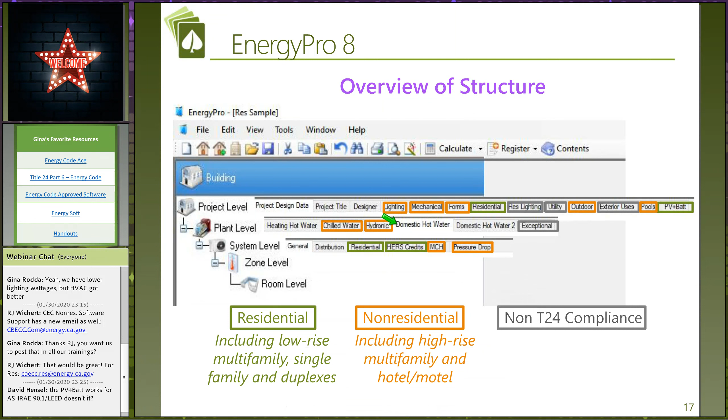The next level of the building tree is where you can go crazy putting in your systems. I want to point out that at the system level, we offer a multiplier. So for that person putting in every single high-rise residential apartment with 300 systems and 300 zones, enjoy your 5-hour runtime.

My approach, we use the system multiplier there, and we trim that down as much as possible, and we get our runtimes down into the 10 or 20-minute range. Same goes for zones - you don't want to go crazy on the zones, otherwise you're going to end up with a crazy, complicated model that takes forever to run. So keep it reasonable, and you should be able to get reasonable runtimes.

The room - now, when we get to the room, you're going to tell me some important stuff here. In particular, things like what do we have as far as occupant ventilation requirements, what do we have as far as receptacle and process loads, etc.

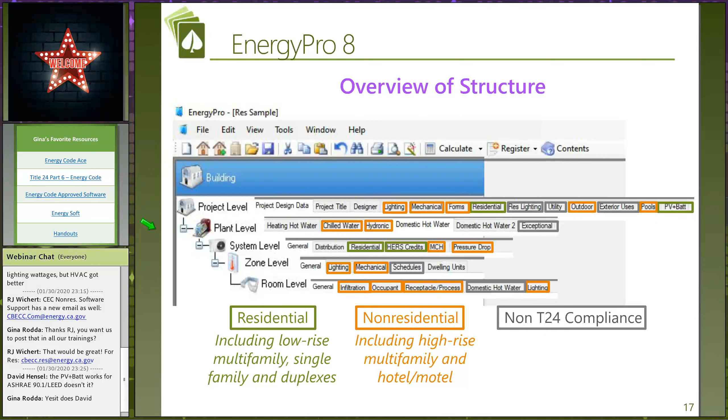While you can go in and do room-by-room inputs, I try to discourage that because that, once again, does load up the run times. I tend to use a one-room, one-zone approach, one room per zone. But that's entirely up to you - I'm not going to tell you how to put your building models together. I just find that the really super complex models take a lot more time to diagnose when you have problems.

We're finding these days, Martyn, using our ventilation system as the primary way to organize our building tree is not a bad idea. Most valuable, yeah, that's actually good advice.

Let's talk about your building scope. We're up at the top level of the building tree here, and you can see there's various inputs. The first one I want to talk about is the building status. Let's just say, so everybody understands, your building is never existing. If your building's existing, then you're not in EnergyPro, you're not doing Title 24 calculations. Existing buildings are not required to comply with Title 24.

Your building is either new, your building has an addition to it, or your building is being modeled with the existing part of the building plus possibly an addition plus possibly alterations. Those would be the three choices you would use there. So existing is not something you would use - you probably ask me what is existing for. Remember, we do other things besides Title 24 calculations here with EnergyPro.

Okay, how about the fuel available at site? Let's read that term again - fuel available at site. Gina, does that say what type of fuel am I using in my building?

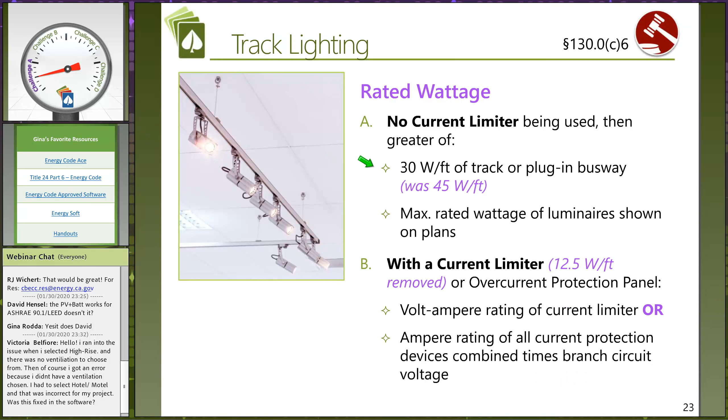Now that we did an overview, let's dive in and really talk about lighting. We're briefly going to go over some of the code changes affecting your modeling regimes. When it comes to track lighting and/or modular lighting systems, we have a change in the watts per linear foot for track — they went down. Usually things don't get less stringent, but this is a case where it did, because most everyone is using LED lights on their tracks. So 45 watts per linear foot of track was grossly outrageous compared to what was really being used, and it's been reduced to 30 watts per linear foot of track.

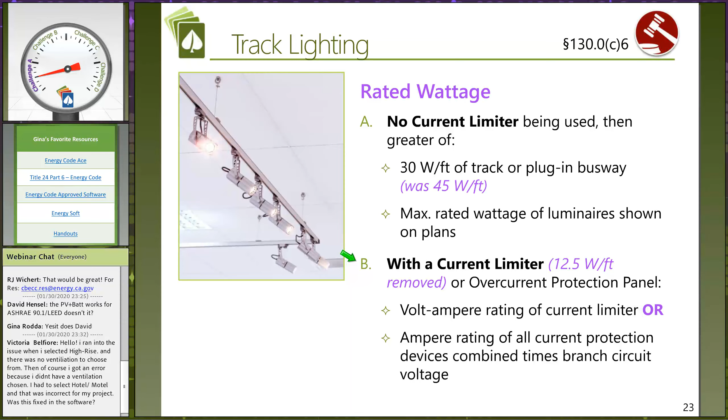There are different ways of showing compliance for tracks, such as current limiters, and they got rid of the 12.5 watt per linear foot of track with a current limiter, and really just said what we want to talk about is what's limiting the current and what that's going to be. So we have slightly different things we need to input to get these to show correctly.

And we have these new power adjustment factors — I like to call these control credits. This is the very first time we're seeing the envelope give us the ability to take advantage of a lighting adjustment that gives me some flexibility.

As we're moving forward in our code development and looking at our buildings as a whole environment, compartmentalizing our buildings and saying I'm doing lighting only, I am not touching envelope, and I am not touching mechanical—well, mechanical goes, I'm only going to do mechanical and I'm not even going to look at your lighting. There's things being left on the table, especially as we're seeing a cross function happening between envelope design and lighting design.

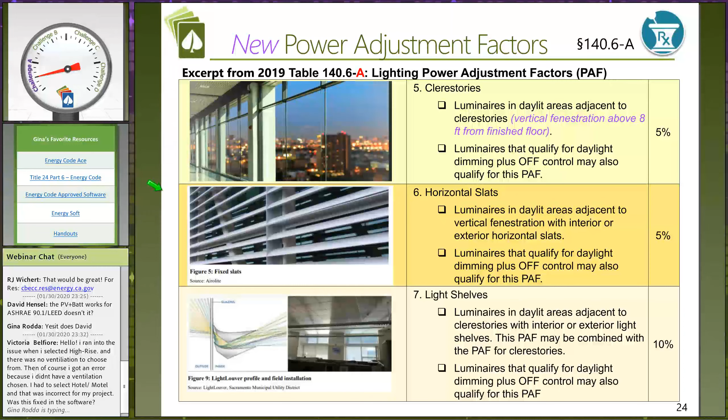And we're probably going to see more of this, aren't we, Martyn? This is an interesting section, because section 140.3 dictates the architectural element, but the credit itself is achieved in section 140.6 under the lighting section.

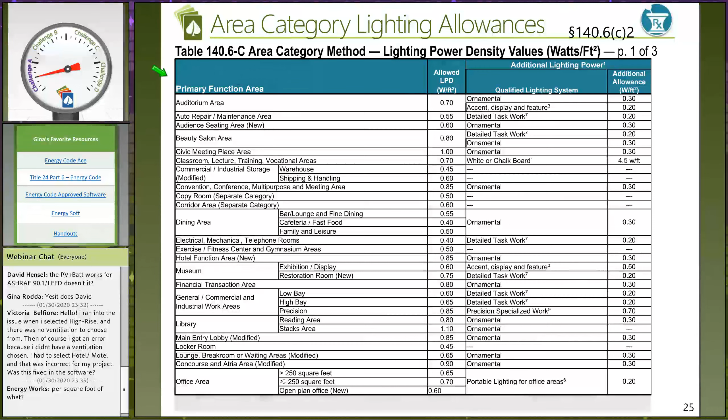Additional lighting power allowances are use it or lose it. You don't get to trade it back towards your general lighting, but it definitely is going to give you that flexibility in establishing what your lighting wattages should be. And it's per square foot of the conditioned floor area of the space—that's what we mean when we talk about square footage, it's of the space that we're modeling. So it's that auditorium area square footage that I'm looking for.

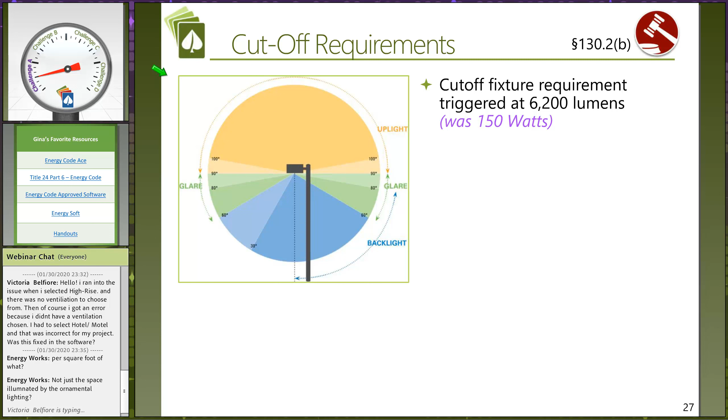When we talk about outdoor lighting, this isn't something we're used to thinking about in terms of performance software, because it's not part of your performance software. It's if you are deciding to use EnergyPro to also show compliance to your prescriptive requirements in code.

Martyn, catch them up to speed on some of these changes that are really going to change their modeling for outdoor lighting. One thing you're going to have to understand is this concept of BUG—backlight, uplight, and glare. They're basically triggering this now down at 6,200 lumens, which back in the day was a lot of wattage on the fixture. But these days, with LED outdoor lights running 150 to 180 lumens per watt, that's not that many watts—you can probably trigger it at 40 watts.

So they're ratcheting it down to much lower wattage fixtures on this requirement, and they're requiring that you take a look at CALGreen Part 11, Title 24 Part 11, and look at the backlight, uplight, glare requirements, getting that rating from the manufacturer of the fixture, and determining that you are meeting that as a mandatory measure.

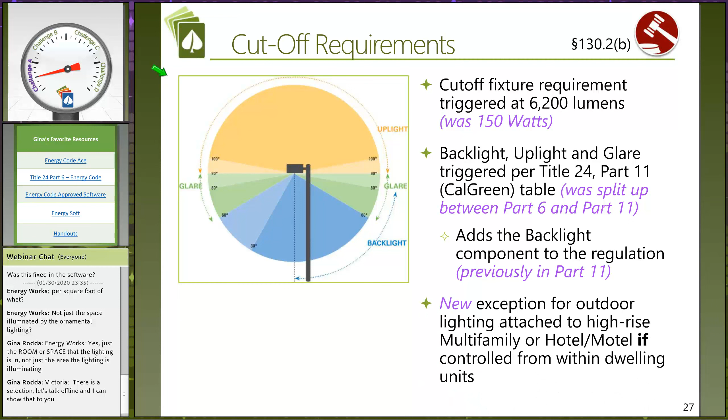So we're seeing a real connection between Part 6, the Energy Code, and Part 11, CALGreen, in which requirements for both of those building code sections are going to be integrated into the forms and into EnergyPro compliance software to be able to utilize the prescriptive form options.

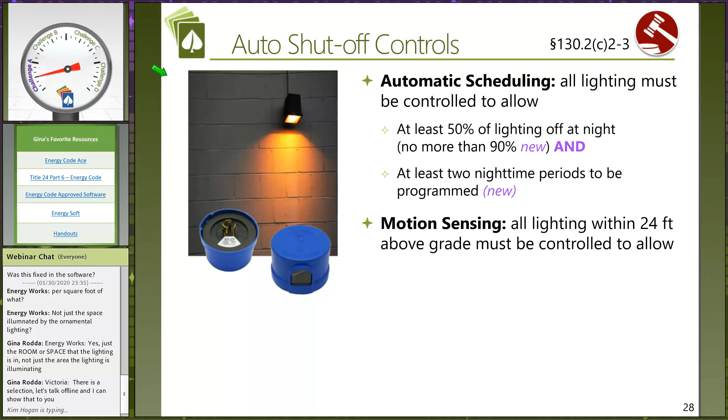There's also control requirements, not just for indoor lighting, but for outdoor lighting. This automatic scheduling control requirement is catching a lot of people by surprise. If you are going to be that energy consultant or person documenting the outdoor lighting controls, everyone has to be on the same page of how they're going to go about satisfying not only the automatic scheduling requirements, but the motion sensing requirements that may be associated with a lot of the light fixtures that are within 24 feet of the ground out there in that outdoor environment.

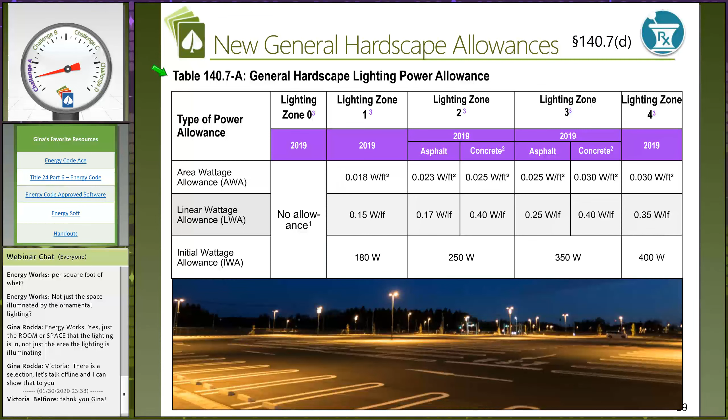Just like for indoor lighting, we see that the wattage allowances for outdoor lighting got reduced quite a bit in this 2019 code cycle. Martyn, talk to them about this asphalt versus concrete lighting issue. Take zone 3 as an example, that would be an urban area. So I'm going to guess everybody here is probably urban. You'll see there that they are giving different allowances depending upon whether that hardscape surface is asphalt or concrete, and concrete in fact gets a higher allowance. So most of our parking lots are going to be asphalt, and probably most of our sidewalks and pedestrian areas are going to be concrete. But that's one of these things you're going to have to make a determination, talk to the design team and say, hey, I see some drawing here of this little plaza area, what's that going to be? And that'll determine what you get for an allowance.

I have come across a couple of projects where they do install the overcurrent panels. The industry has had those out for quite a few years actually. There's one product out there, not that I'm supposed to name products, but it's the only one I know of. It's called the Silver Bullet.

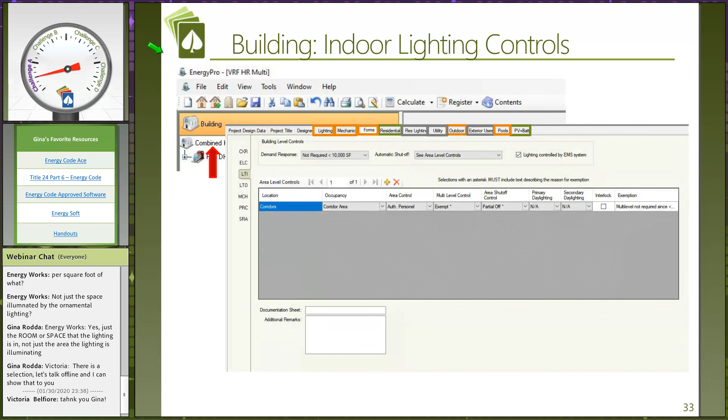We have found sometimes we have to have people change their light choice just because we cannot find the cutoff ratings to be able to document that they're meeting these Cal Green requirements. So there's definitely going to potentially be some more work regarding our outdoor light fixtures that are over 6,200 lumens.

Now we're going to spend a little bit of time on the Forms tab. Martyn, walk us through this Forms tab. We actually have the majority, well, all 10 of the compliance forms that are required for Prescriptive captured in the software. You'll find this tab here is used for documenting the NRCC CXR commissioning review form, a mandatory requirement. There's another mandatory form you need to document, the electrical distribution system.

I've got indicated here, or you do, the LTI tab. This is where I input information on the controls associated with indoor lighting. This tab serves two purposes. Number one, it documents on the prescriptive compliance form the various types of controls you're installing. Number two, it is set up to pass the same information over and document it on the NRCC PRF01.

Now, it turns out right now that PRF01 is not actually spitting the information out. It's being handed the information, but it's not yet configured to document the controls. We are going to be getting an update from the Commission, and that update will eventually document on the PRF01 the control entries you put in here. So just for the record, anything you see here is not currently activated on the PRF01. Once it is, you'll start to see it populated there.

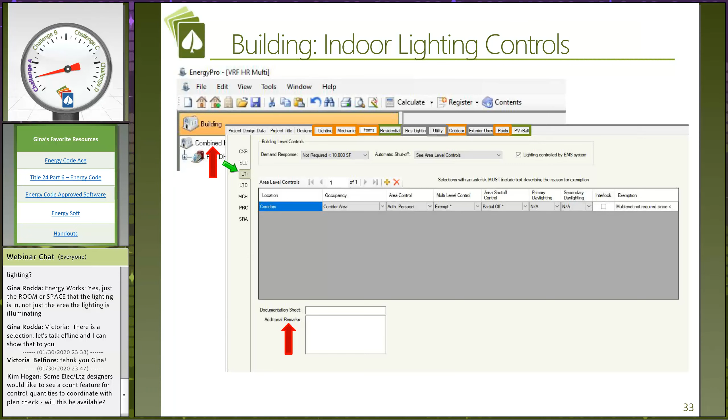Is that correct at the project level? There's no field currently for the exemption you just pointed out on the far right of the first form. That's a prescriptive form thing only, but it will make the difference between it showing compliance or not.

Here's my outdoor lighting tab. Nothing is new here. You do need to make sure you have your appropriate outdoor lighting zone and that you've engaged it, doing proposed outdoor lighting as installed versus use override.

Martyn, when would I ever use override? It would be useful if you were doing a calculation like ASHRAE 90.1, because ASHRAE 90.1 includes that energy component in the calculation, but the Title 24 calculation does not include any outdoor lighting. It's not on the documentation, it's not in any of the calculations. So the only purpose of putting outdoor lighting in is either for other codes like ASHRAE 90.1, or if you need to do the prescriptive form.

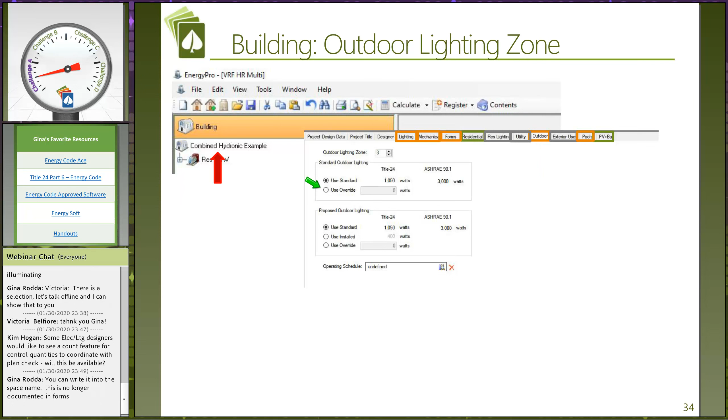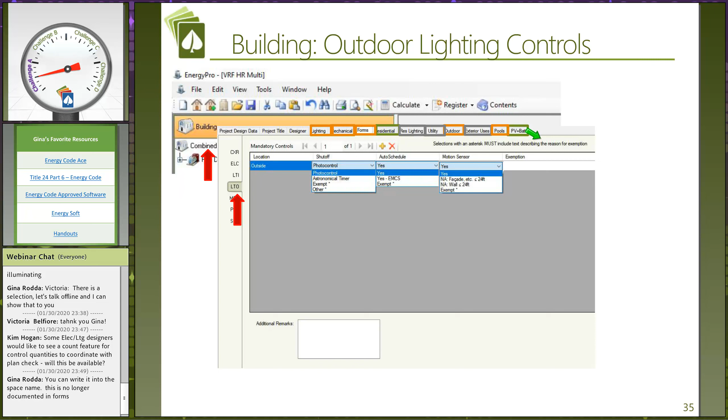Let's take a look at the controls for outdoor lighting. It should look awfully familiar - very similar to what we see for indoor lighting. Here are your different choices, remembering that if you choose anything with an asterisk for the prescriptive, since this is only prescriptive now and never shows up in your performance calc, it must be included. Martyn even notes that selections with an asterisk must include text describing the reason for exemption. Otherwise, the form won't show compliance to your prescriptive calculation.

Martyn, talk to them about these power adjustment factors. Got it - there's an allowance table in section 140.6, I think it's 140.6A, and that's the power adjustment factors table. We gave you an excerpt of part of that a little bit back there. There's all sorts of lighting controls you can take credits for.

However, if you try to take credit for a lighting control that is listed in the table as not valid, the software is going to flag that as an error. Let me give an example: say you're doing a new classroom and you install occupancy sensors. EnergyPro is going to flag that as an error, say no can do. Why? If you look in the standards, occupancy sensors are mandatory in classrooms, so we're not going to give you credit for a mandatory control - only ones that are allowed in table 140.6A. You can see those ones Gina talked about at the bottom there - the clerestories, the slats, the light shelves, etc.

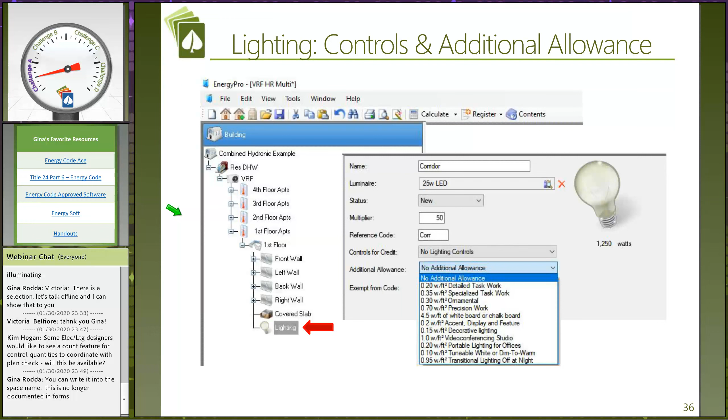I also want to tell people to think about this when doing your performance models, for indoor lighting in conditioned spaces, because the more you put into what you're allowed to do in your baseline building, the better your compliance margins will be. So don't leave these off the table, especially if you're not complying by 0.02 and could have used additional lighting power adjustments. That's just leaving energy on the table, and we shouldn't be redesigning buildings just because we're not modeling it thoroughly.

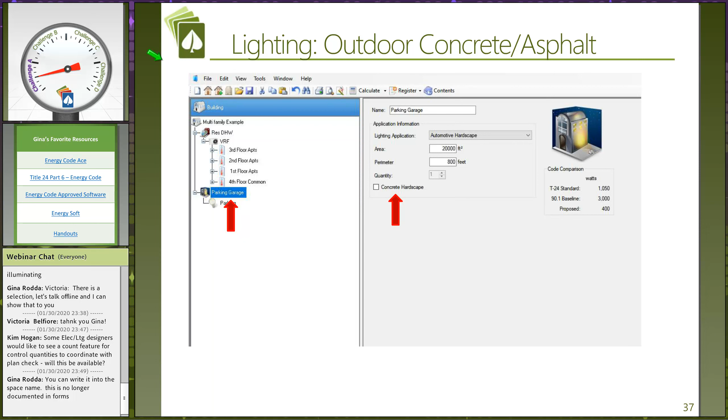Here we have our outdoor lighting. We have different choices now for automotive hardscape versus pedestrian hardscape - nothing new there. What is new is this concrete button. If you don't click it, it assumes asphalt; if you do click it, it assumes concrete. So you might have to break out your sidewalks separate from your parking lots, like Martyn was saying, to properly account for your allowances of concrete versus asphalt. You might have to break things down a bit more. Let's see what that looks like on the forms.

We're always going to have a compliance software version - it's really important we're keeping up on using the latest and greatest certified software for our permitted projects. Scope of work - make sure that's linking up to what you think it is, because it could really be changing your compliance margin if you accidentally modeled something as an addition versus new construction or an alteration.

Absolutely. So in EnergyPro, you can specify what your scope is going to be. We've got a bunch of check boxes there - you can say yes, I want to do envelope, yes mechanical, yes domestic hot water, yes indoor lighting. Those will get checked off according to what you select for scope.

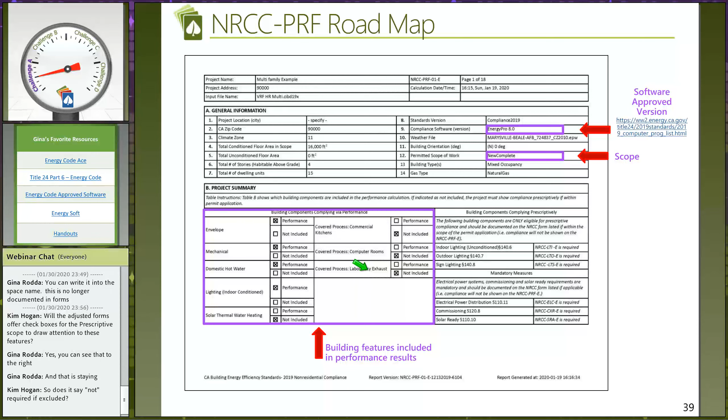I'm with Martyn. The process forms have a lot more support to the control requirements and other things above and beyond just the fan energy. And I have a tendency to use the prescriptive or mandatory process forms instead.

Martyn, what would I use C2 for? What is this above code qualification thing all about? Well, as you're aware, there are a number of jurisdictions in the state that have said the state energy code, what Sacramento is putting out, is not good enough for us. We want better buildings in our jurisdiction. So they've got above code ordinances that say you've got to do better than Title 24. It depends on the particular ordinance as to what they've got. And I'll promise you guys there's more ordinances coming out this year. So we're expecting a lot more ordinances from these jurisdictions.

So what you're seeing down here are all the other energy use components being reported. What's missing from this table, which is kind of interesting, is that this table below will include, when you specify it, PV plus batteries. So if you decide to put that into your calculation, you will get that show up in the bottom table.

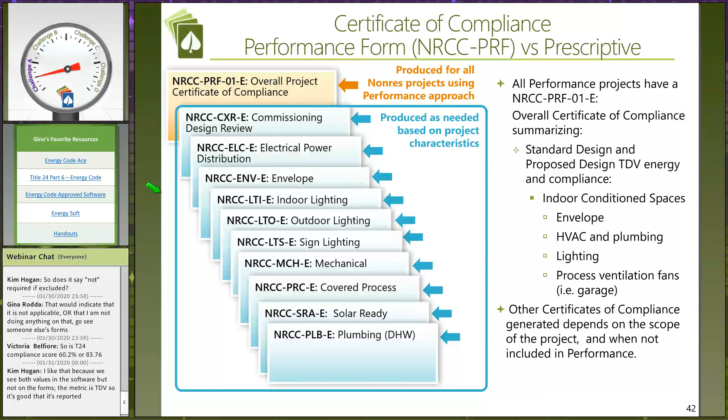Building departments are still getting up to speed on this too, so do expect to get a few plan check comments in which you're going to have to bring them into the fold of these new prescriptive forms.

Here's an example of the outdoor form for this particular project. As you see here, it's the NRCC LTO-E form. And project table B, pretty across the board whether it's performance or prescriptive, is going to be talking about what's the scope of the project, what's included.

And this is brand new, table C. Martyn, talk about how table C is important to these prescriptive forms. Every single prescriptive form is going to have a table C, all 10 of those that I just showed you. And on each one, it's going to show the compliance results.

So there's a couple of things going on here. We comply with the allowed wattages, in this case the allowed hardscape, general hardscape wattage. We comply with the cutoff requirements. We comply with the requirements for lighting controls. If any of those states we don't comply, then you need to go to that particular section, and it specifically tells you, see table G, see table H, etc. The general lighting is over on table I. It's telling you where to find all this information to find out why you do or do not comply.

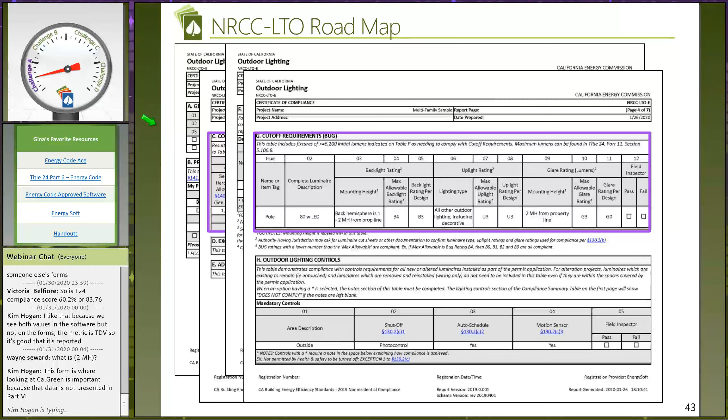Kim is saying this form is where looking at CALGreen is important because that data is not in Part 6. You're 100% correct, Kim. Energy Code Ace has a fact sheet called Mandatory Lighting Controls that has all of those tables from Part 11 integrated into it, so you can see Part 6 and Part 11 side by side and really send that to your clients so they understand what light specifications they need to provide. We see our outdoor lighting controls look very similar to what we've been seeing for indoor lighting.

Now that we've gone through lighting together, let's ask you a couple questions to make sure we're on the same page. My first question: which of the following lighting locations are going to be included, if you so desire, in your performance calculation? And alternatively, which of the following lighting locations will require you to use the prescriptive method? I don't care what you did in the performance method. And at the project level, which tab are you going to use to support the prescriptive forms?

Okay, this is how we can tell how many of you are multitasking. A lot of you are multitasking. Okay, I have at least half of you now answering my question.

Okay, for this first one, Martyn, which lighting location can be included in the performance results if they so desire? So the only one that is factored into the calculations would be lighting fixtures that are in conditioned spaces. So for those of you who picked conditioned space, you are spot on. All the other locations are not something that's going to be included in your performance calculation. Yes, you might have modeled it in EnergyPro, but you need to know it's not going to be included in that NRCC perf form.

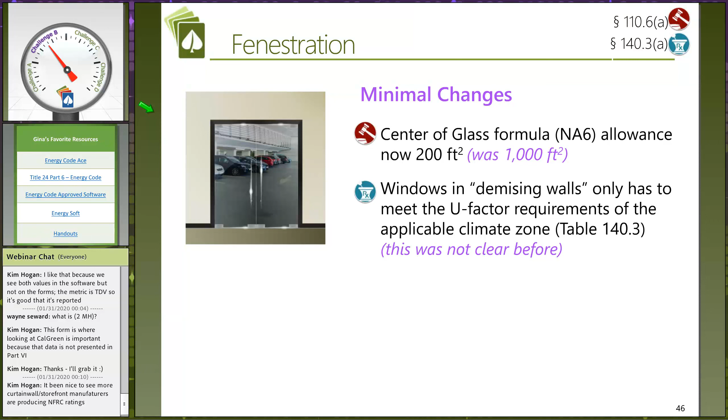Windows in demising walls - those are walls that separate enclosed unconditioned space, such as a parking garage, from enclosed conditioned space, such as, let's say, an office building. This picture here is showing an example of me looking out of my office building into my parking garage. This glass door only has to meet the U-factor requirements of the code and does not have to meet the SHGC or VT requirements.

Tubular skylights - this is them relaxing code to help promote this amazing way of bringing natural light into spaces. Martyn, what's different here? So in the 2016 code, tubular skylights technically fell under the plastic skylight category, but now they're given their own category. And one of the things they don't have to do is comply with the SHGC solar heat gain requirement, and that's primarily because they're plastic dome products.

And so to get a low SHGC and still maintain a really good visible transmittance kind of dictates that you need a low-E coating. But sputter coating a metallic low-E onto a plastic dome does not have a good outcome. So net result, it just doesn't make sense. Well, no, it doesn't - it melts the plastic.

So you get my point - you can't put a low-E coating onto the plastic. So as a result, they say, all right, let's not worry about the SHGC. Let's go after the VT so we can get lots of good natural daylighting in the space.

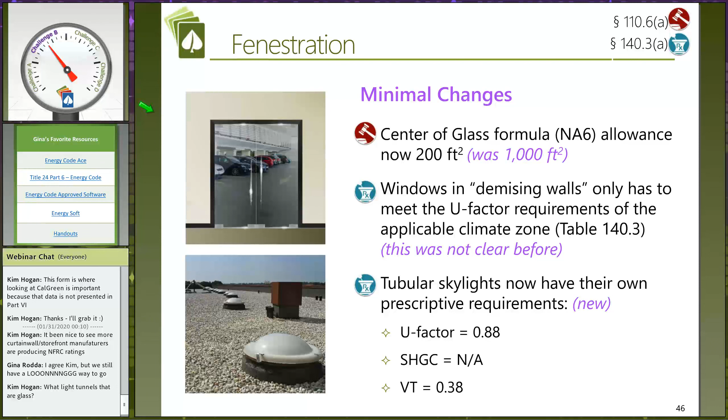And what this means to us is, for those of us who have been using these tubular skylights all along - I know I have - I've been taking a pretty big hit in my performance calculation. Now that's not going to happen as much. Light tunnels that are glass, well, those are considered skylights, Kim, and I don't think I know of any solar tubes or anything like that with glass versus plastic. Do you, Martyn? No, they're all plastic dome. Yeah.

Okay, let's talk about modeling. We're going to start with our assemblies, and we're going to look at fenestration. I'm going to have Martyn walk us through these different aspects of what we're seeing here for fenestration.

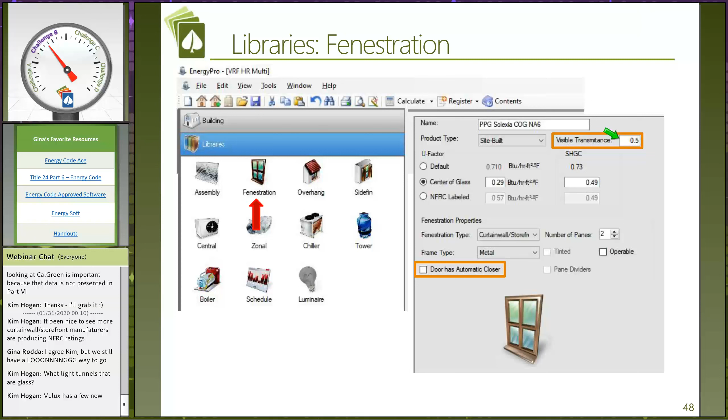What I'm going to use for center of glass, what I'm going to use for default, and what I need to use for NFRC. Default, I highly recommend you reconsider using that in your Title 24 calculations, just for the simple fact that you'll get to the end and find your building doesn't comply. Center of glass, Gina's already talked about the limitation there: 200 square feet, and that's it. You're out of that approach on a site build. So this leads you towards the most likely candidate, which is an NFRC labeled product, National Fenestration Rating Council. Give me the U factor, the solar heat gain coefficient, and don't forget the all-important visible transmittance. That's a very important number to Title 24 compliance. Once you've given me those three numbers, we're kind of good to go.

Talk to me about the fenestration properties. How are those important? If you look in the Title 24 Standards, Section 140.3, the table lists different types and criteria for compliance. There's compliance for something like a fixed window, a different compliance criteria for doors, and another one for curtain wall storefront systems. One is fixed and one is operable as far as the windows go. Those designations dictate what the standard building is using in the energy budget. So what you should be doing is distinguishing in your building between the different fenestration types that we describe. And of course you see the skylights there as well, right? The skylight tables also have distinctions based upon whether it's with a curb, plastic, glass, etc.

How about the door automatic closer and this operable checkbox button over here to the right? Sure, so there's a distinction in that table in 140.3, and the distinction is: is a window operable or is it fixed? That'll tell us which you get compared to in the budget.

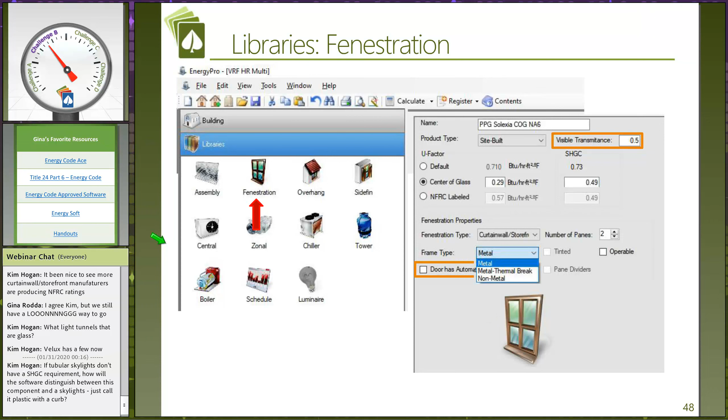The operable checkbox is part of the window door interlock issue also. If you have this checked off, then the compliance software, if it's a non-residential building or a hotel motel building, is going to assume in the baseline building window door interlocks between the HVAC system and/or the controls in the space for that zone. If you don't have window interlocks modeled in your building and your mechanical side, you're going to be taking a penalty for not providing those. In the 2019 code cycle, they removed the requirement for window door interlocks for high-rise multifamily buildings, but they are still in play for non-residential and hotel-motel buildings.

Let's now look at our forms. So here we have our envelope. This is the very first table we see for envelope, and I use this one all the time just to get myself a sense of: have I modeled most of the building? How am I in terms of my fenestration area per orientation? I always take a quick look at these window-to-wall ratios. Whenever I have someone send me a file going, Gina, I'm so out of compliance, what's going on? I always look here because, Martyn, what do we find here that tells us something about their compliance margins?

Title 24 prescriptive requirements will give you an allowance of 40% of the total gross surface area of the walls. It also will allow up to 40% on the west facing. So when you look at the total here, which we see identified as being 19.6%, we can say okay, we're okay as far as Title 24 goes. When we look at the west facing, we say 10%, we can say okay, we're okay. But when those two numbers exceed 40%, either one or both, then that's when you're taking a significant penalty for that envelope design, in that it's got too many windows on it, and you'll need to rethink that if your building is out of compliance.

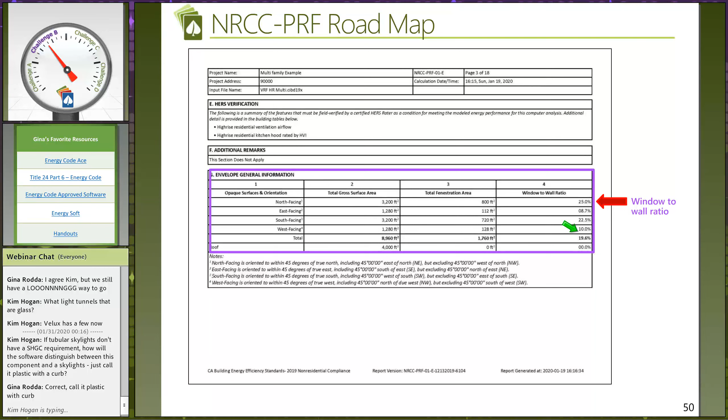So it's a real great way to give you a gut check of what's going on with your envelope.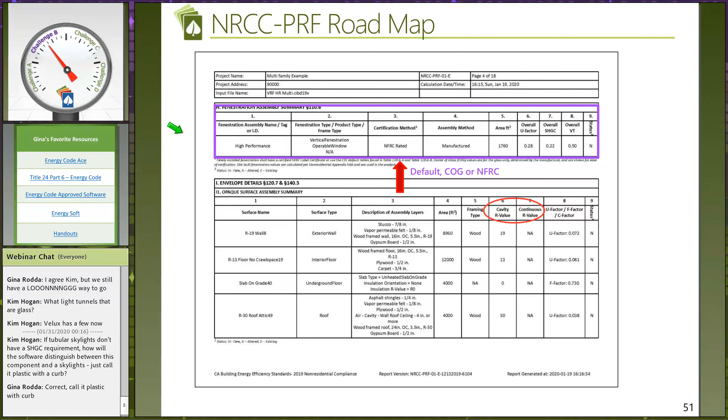It's right there. I wanted to call attention briefly to our performance form, and this is also in our prescriptive forms, that we do break out separately insulation interrupted by framing, which is cavity R value, versus insulation that is not interrupted by framing, which we call continuous R value. One of the exciting things we just saw is the CF1R also now calls out insulation this way, aligning our documentation between our residential buildings and our commercial buildings.

HVAC, what is so exciting about VRF, Martyn? Well, other than the fact that they're asking for higher efficiency models, which shouldn't be an issue, we can now model them in the performance approach. So this is big news. It's been a lot of years coming in terms of allowing the performance tools to model the VRF, but now we can model them.

And I have to admit, I know there was some grumbling from the manufacturers as to the details and whatnot. I have to admit, it's a very satisfactory outcome. The VRFs are looking pretty darn good when it comes to compliance.

And I believe, Gina, you were saying you were doing some buildings where you were hitting 20% better than code, thanks to your VRF system. Well, that was someone who sent me a file going, something's wrong, Gina. Something's wrong, I'm at 20%. How did that happen? I ran the same building in 2016, and I was minus 15%. What's wrong? And I'm like, it's right.

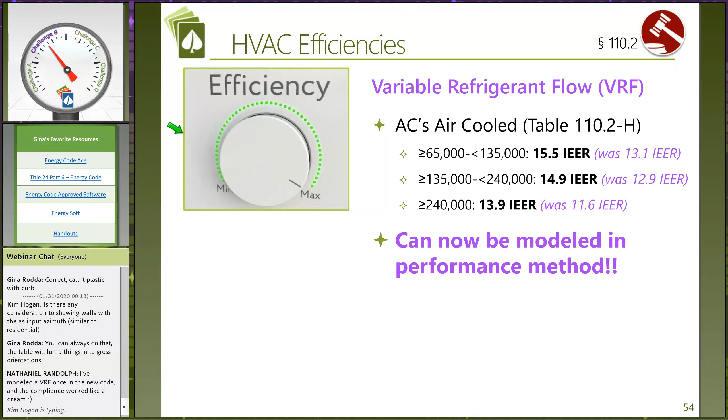That's right. And I was able to verify it. I was able to look at the standard baseline reporting behind what it was being compared to. It was being compared to a package VAV, and the fan numbers for VRF are a lot better. So package VAV, the fan numbers are much higher than VRF, so it's getting really nice credit for that particular design choice. And there's even more fan credits we can see associated with our systems.

We do have MERV 13 filters now for all new systems and all systems that have all new ducting. So that's something to be aware of. But what also we have, which is really allowing our mechanical modeling to really reflect the design, is these fan power adjustments. Martyn, how do I use these?

Well, the fan power adjustments are credits that are specified in section 140.3 of the code. There's a table there. The general idea behind the fan power adjustments is you're designing a system and you get a certain fan power allowance. But because that system has something in there that is going to require additional fan power - let's take an example, it's got a fully ducted return - then they're going to give you additional fan power allowances in the energy budget. It's not going to change the consumption of your building. It is going to change the actual energy budget that you're compared to. And it's definitely something you want to consider.

Also, keep in mind, Gina, you put the MERV 13 filter up here. I want to make it clear to everybody that's a mandatory measure, and you don't put that into the software. It has a MERV 13 filter. That's already built into the fan power allowances. So it's only when you push the MERVs up higher to like MERV 16 that's when they give you additional allowances. Somebody asked me the other day, do I get an additional allowance from MERV 13? It's already built into the numbers. It's already there.

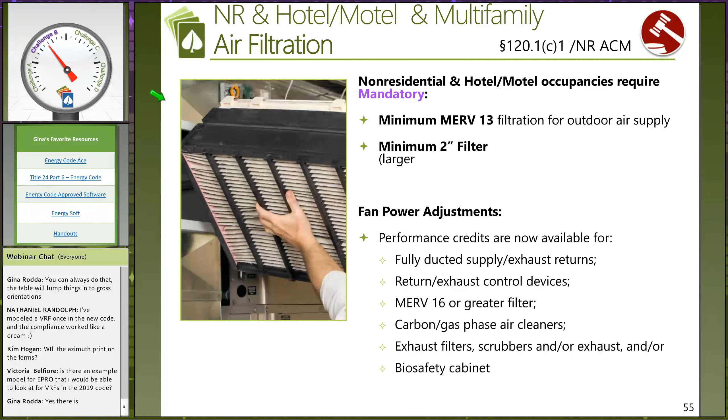What I like about this is it's much cleaner for us to document these adjustments now. Before, it was this weird number, or what is the static pressure, water column, blah blah blah, and you'd have to ask the mechanical engineer, give me a number. Now we have things that can be clearly documented that match up with the design of the building, and to me it still makes more sense. It's easier to do as an energy consultant.

Demand control ventilation, these are CO2 sensors. We are going to be seeing more of them because the requirements for them have been expanded to include any modulating outside air control system and/or any system that has outside air exceeding 3,000 CFM.

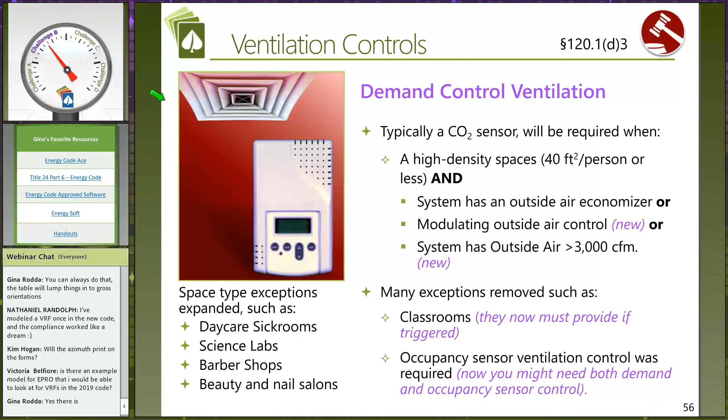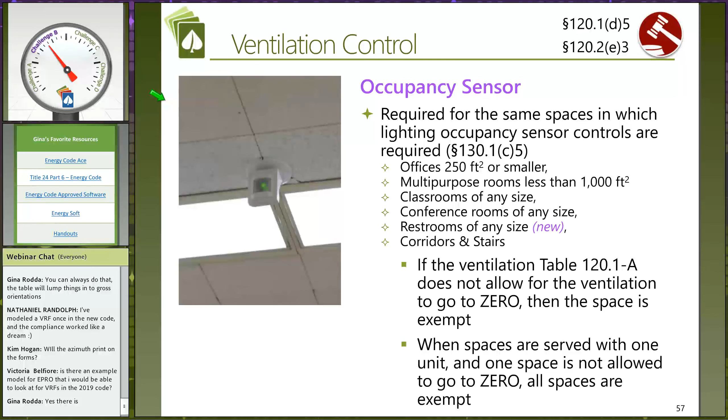These are not new controls. We're just going to see them more often. This is another control that's not new at all: occupancy sensor ventilation control. What is new is the code saying that in these spaces where I have lighting control occupancy sensors, here's the list of it, my ventilation table is allowed to go to 0. That occupancy sensor ventilation control is going to shut down the ventilation when no one is in the space. So this is a pretty new thing.

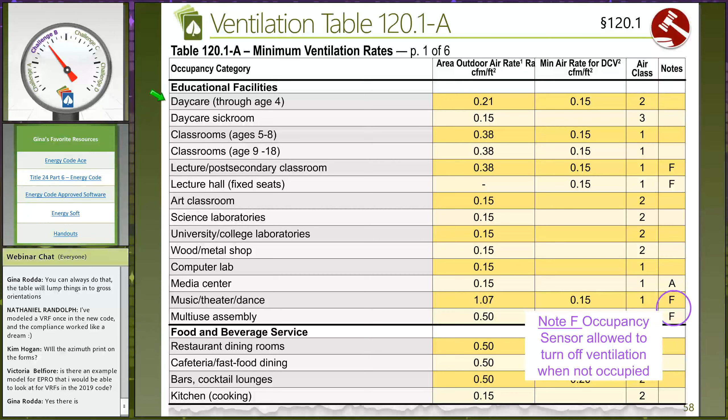Let's take a look at this ventilation table to see how we determine if a space is allowed to go to 0 with this footnote F. There are a lot more occupancy categories now. This matched up exactly with what Martyn showed you guys at the beginning of our webinar about setting up the occupancy for your zone, which also then sets your lighting categories. So there's a lot more going on now for ventilation.

My mechanical engineers out there, I sure hope you're beefing up on these new requirements, especially for ventilation in the energy code, because it's a whole new game.

Martyn, tell them why we think this is one of the most important blueprints people need to have on hand when we consider occupancy sensor ventilation control.

Absolutely. So when the Energy Commission published the code, there's certain language you'll read in section 120.1. If you read it verbatim, it kind of says, look, if you've got any F-based occupancies that also have the lighting occupancy sensor, then you've got to do this. And that leads you to believe that if I've got a single zone system serving all these different spaces, and I have 3 F occupancies and one non-F, then I kind of have to have the sensors in all the different spaces. That's kind of what it leads you to believe.

Well, the clarification here is: if you've got 3 F spaces and then 1 non-F space, in that circumstance you don't need the occupant-based ventilation control, period. You may not get that by reading the actual text of the standards, but you certainly will get that in this clarification. So it's a very important blueprint for those of you doing mechanical design and modeling.

And I like that they just gave a few different scenarios. I really do think they thoroughly answered that question.

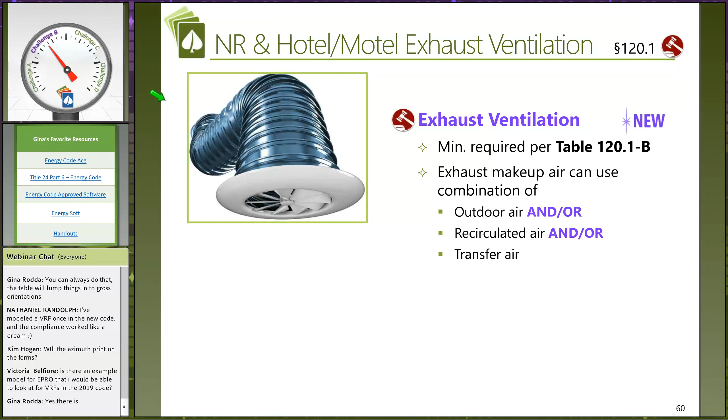Multifamily, this is going to apply for both low-rise and high-rise. This is the first time we're really seeing an alignment of low-rise and high-rise ventilation requirements, not only for the ventilation rates, but the ventilation requirements and other indoor air quality requirements. Martyn, walk us through this.

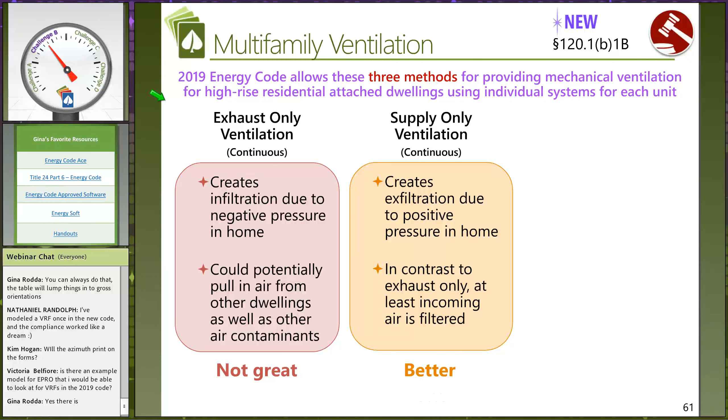Absolutely. So one way to provide ventilation in this situation, and this is probably a fairly common scenario people have been doing over the years, is to simply put in an exhaust fan and pull air from wherever it comes. So yeah, that's not the greatest approach. The second one is a little bit better, and that's to pull air from the outside and supply it into the space. Obviously that requires the MERV 13 filter we talked about, and that does put the unit at positive pressure.

So the third approach is what we call a balanced ventilation system. In the case of the balanced ventilation system, we are at neutral pressurization, and we are providing ventilation into the unit, taking ventilation air back out of the unit, and basically the HERS rater is doing tests on all three of these circumstances I'm describing, which is new, and they will verify if we comply. In the case of the balanced ventilation system, they will make sure that the amount of air coming in and going out is within a certain threshold.

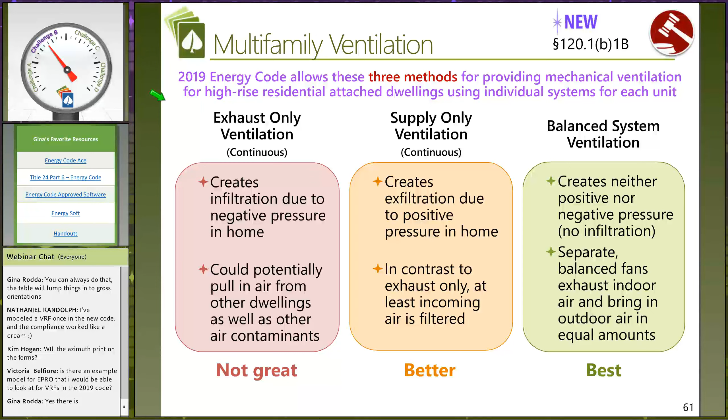I don't remember what the test criteria is as far as how they have to match, but I'm sure it's some percentage threshold there. But one of the things you need to be aware of as you go down the path of multifamily ventilation is the requirement for a blower door test on all the dwelling units. So if you go with a balanced ventilation system, you get a pass on this one. You don't have to have the HERS rater blower door test the units.

But if you go with the other ones, exhaust only or supply only, well, guess what? You're going to get the surprise of having a HERS rater come out, and they're not only going to test the ventilation systems, but they're also going to do a blower door test.

What concerns me about this is the stage of the project at which this occurs. So how many projects do you see where their last minute thing is, hey, you need to get your HERS inspections? Okay, so here we are. My thing is these buildings aren't even used at all to dealing with the HERS rater, so this is a whole new thing, period.

Well, let's take a 40-story tower. I'm doing a new condo tower in San Diego. I was speaking to some HERS raters. I said, you guys are going to have some fun testing these things. The point is that the real estate agent is standing outside, and they've got all the lease contracts, and everybody's ready to move in.

HERS rater shows up and says, hey, the first unit I tested failed, so I get to test the second unit. Second one failed. Okay, now we have to test all 7. They get to test 1 in 7. If 2 out of 7 fail, they have to test all of them. Well, okay, now we're doing some more testing here. Better get a big crew in, because you got 200 units I got to test.

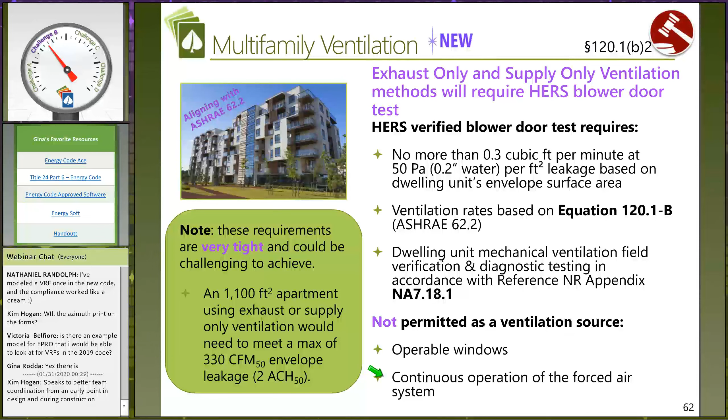The 2019 code says you can't do that. You have to put in a specific ventilation system that is independent of the forced air system that will provide this functionality. So things are changing in this particular segment of the industry.

And also they want verification on the range hoods. So once again, HERS raters normally don't go into these occupancies and do these things, but in the new code, you will have to get a HERS rater in to visually verify the particular model of hood that has been installed, compared against the HVI directory.

Now, for those of you preparing Title 24 calculations, you're probably thinking, oh, we got HERS now. That means the certificates of compliance need to be registered with a HERS provider. No, they do not. The only forms that need to be registered are the ones in the field that are filled out by the HERS rater, and that's the NRCV MCH32H. Your forms do not have to be registered with a HERS provider.

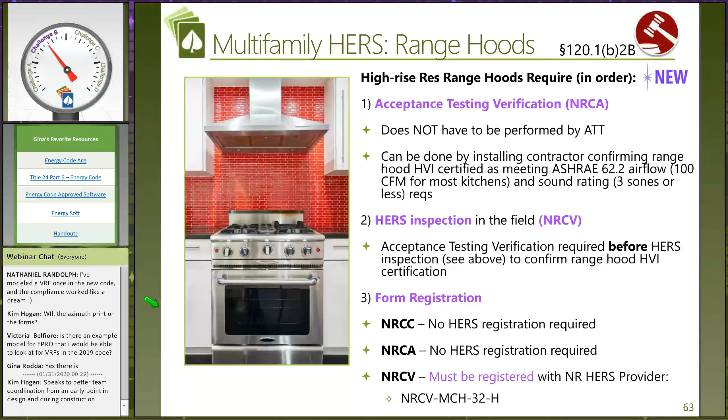But now we just saw with our multifamily buildings, we have a HERS rater that's going to be out there for at least 2 things at every single dwelling unit, and potentially a third depending on how they do their ventilation system. So a lot more HERS rating. For the very first time, we're going to see HERS rating for every single multifamily building and every single altered multifamily building that has new kitchen hoods and or ventilation systems.

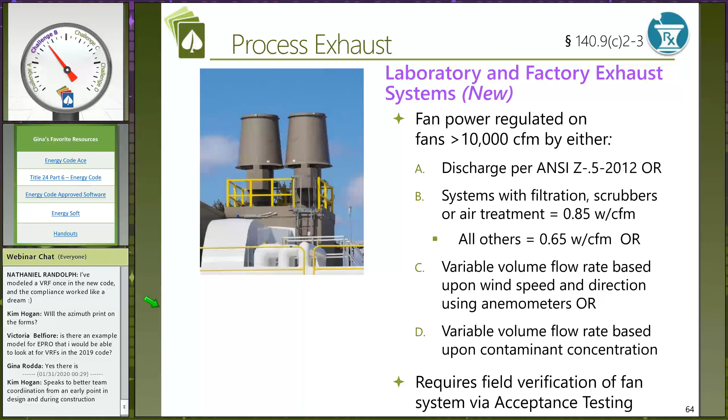There are new requirements for laboratory and factory exhaust systems. As we talked about earlier, yes, you can do these in your performance calculation, but it might make a lot more sense to pull it out and do it prescriptively, but you could still use EnergyPro to model all of that and get that going in terms of documentation.

So Victoria asked, is there going to be an example model from EnergyPro that I can look up all these VRFs? Martyn, what's the answer to that? We have our sample files that are available to you. They're both on our website and installed onto your computer as part of EnergyPro. And we've got a whole range of different equipment manufacturers' stuff already in there. And the manufacturers have been very good about keeping those libraries up to date for us. So check them out, and certainly I would encourage you to use those libraries as opposed to reinventing the wheel.

There's an example file for each manufacturer, so you're going to look for your particular manufacturer, and you're going to export. So this is where you're going to open up that sample file, pick the exact piece of equipment you want. Here are my outdoor units, and export it to your file. So you're going to have your file open so that you can export that piece of equipment into your file.

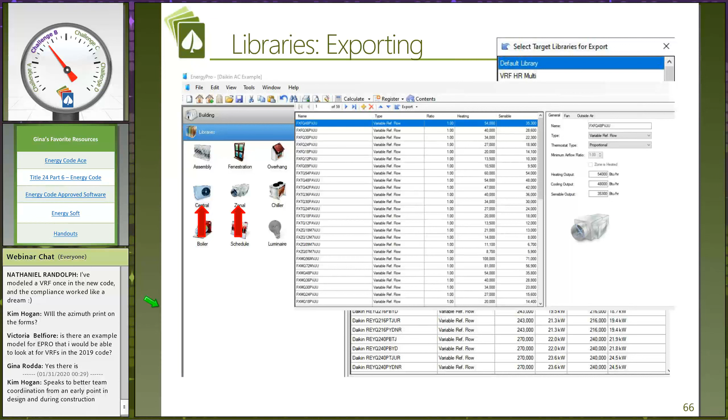And then you're also going to do this for your zonal equipment, because a VRF system has 2 components, an outdoor component and an indoor component. So you're going to do it twice, once for your outdoor equipment and probably multiple times for your indoor unit if you have different sizes of equipment for that indoor specification, which is very common.

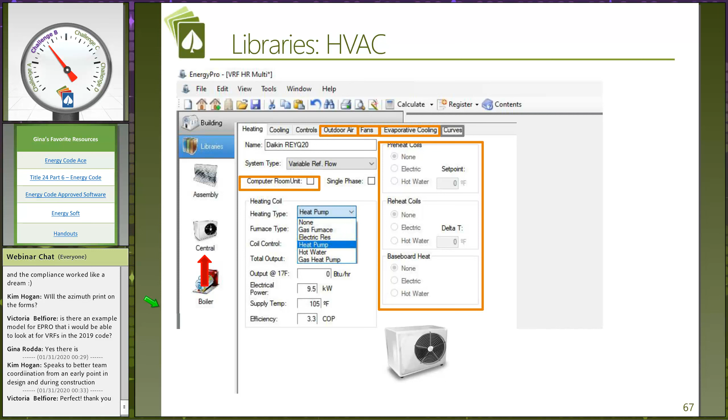So taking a look at our central libraries, we're developing our systems. Really, honestly, really nothing new here, except for saying, please, when it's VRF, start with the sample files of that manufacturer. It's a much better way to get things started. We have all the choices that we've had before for both heating and for cooling. There's nothing new here, except for the fact that we get to use that VRF equipment that Martyn has had in there that we've been using for LEED or other non-calculation projects up to this point.

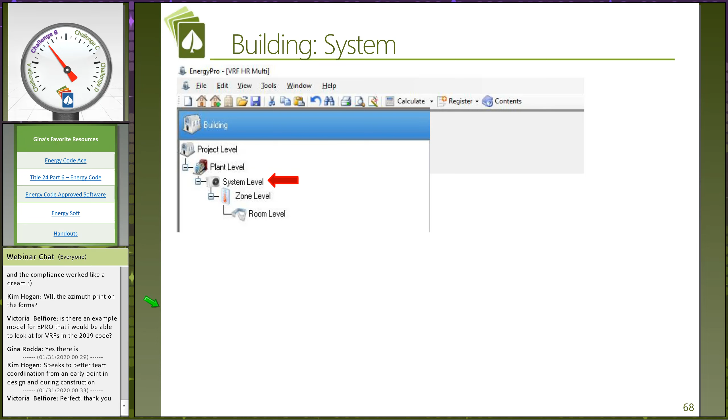Here at the system level, we're going to be picking the piece of equipment that we modeled. Again, nothing new here at all. You're going to be picking that equipment. What is new is this pressure drop tab. Martyn, let's go through this with them. Absolutely. So at the system level of the tree, move to the right, pressure drop.

You can put in optional devices that you have in your HVAC system. You simply check the box here, fill in what the airflow rate is across that device, and you will then get credit in both the prescriptive and the performance calculations. So this tab applies to both.

Well, we had a question earlier, and I thought I'd remember it while we were on this. Where do you get that CFM rate? Well, it depends. For example, if it's a fully ducted return, then how much air are you running back onto that return? Probably in most cases, you're running all the air back on that return. But on the other hand, you may have a situation where you've got air that's for a biosafety cabinet. It's a 4,000 CFM system. 2,000 of it is going into the space. The other 2,000 is related to the biosafety cabinet. So there's an example where you change that down to 2,000.

So you'd basically ask the HVAC designer how much air is flowing through that particular device. And it is standard practice for this to show up on their mechanical layout drawings. It's something that they've been putting on there for years. We finally now get to use it. So this isn't a whole new game at all for our mechanical designers. What the whole new game is, we get to use the information they're providing us.

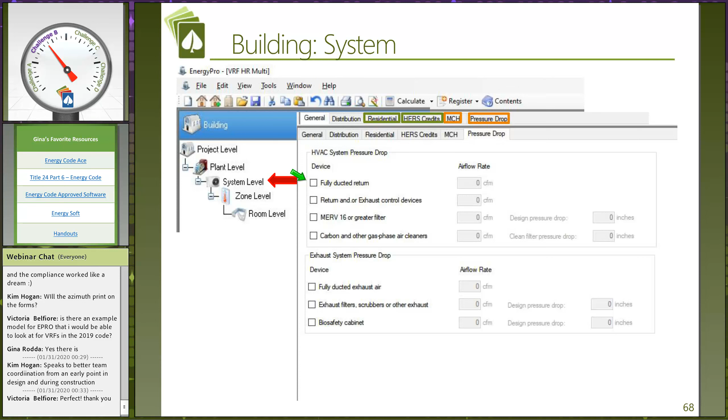It's well documented there, but it hasn't made the performance form yet. Okay, I'm writing that down, Martyn. That's okay. RJ's, just so I can double check. RJ's taking good notes, I hope. Okay, good.

And Martyn, tell them what's the trick about what number I put in there? Do I have to put every single system that has a different pipe length into 2,000 different zones? No, when we're looking at each condenser, the question on the condenser is what's the maximum pipe length that we have? So if you had a condenser with 6 indoor units, then really we're just looking for what is the longest length of those 6 units from the condenser out to the indoor unit. So don't get too into the weeds on that one. That's the ultimate question that we're asking there.

The only time you would use that is something like an indirectly or unconditioned space. Natural ventilation - you don't want to go there. Natural ventilation is not an acceptable modeling choice for any of your commercial occupancies.

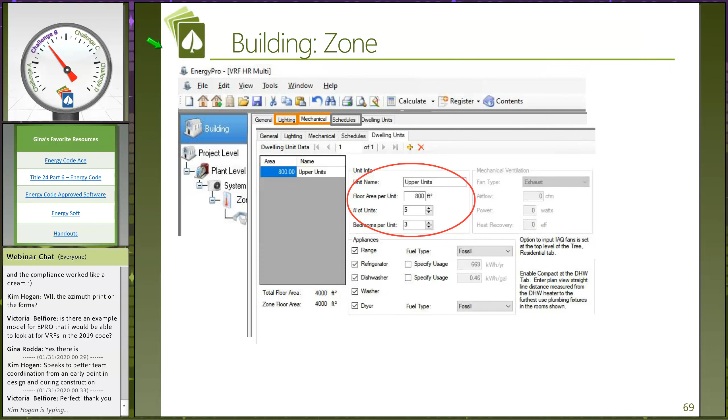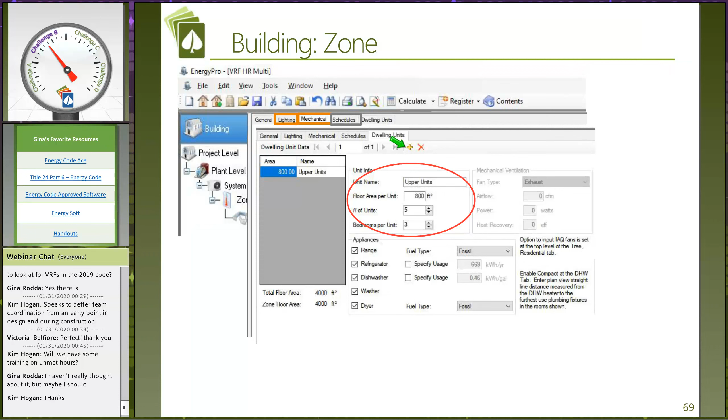What's important about our dwelling unit tab for multifamily and hotel motel? This dictates the ventilation requirement. The ventilation requirement in the new code is based on the floor area for the dwelling unit and the number of bedrooms. What you can do here is add a whole bunch of items to this list using the yellow plus sign, building it up to define all your 1-bedroom units, 2-bedroom units, 3-bedroom units, etc. That'll take care of the ventilation calculations properly.

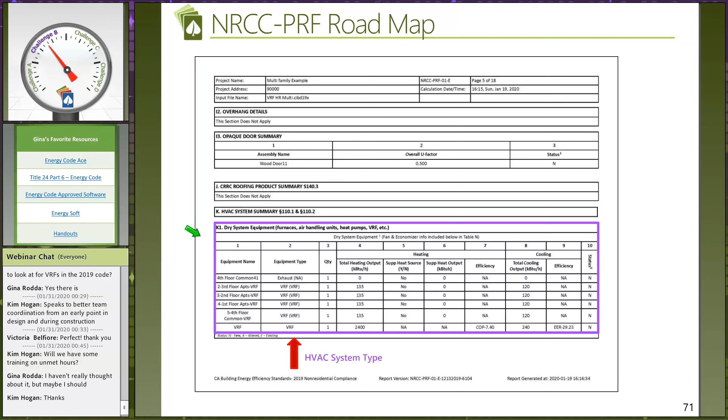Let's talk about what we're seeing on the forms. We'll start with our dry system table. Nothing really special here, it looks exactly like it did before, but for the very first time we're seeing VRF there and the equipment type. So exciting. It really is so exciting.

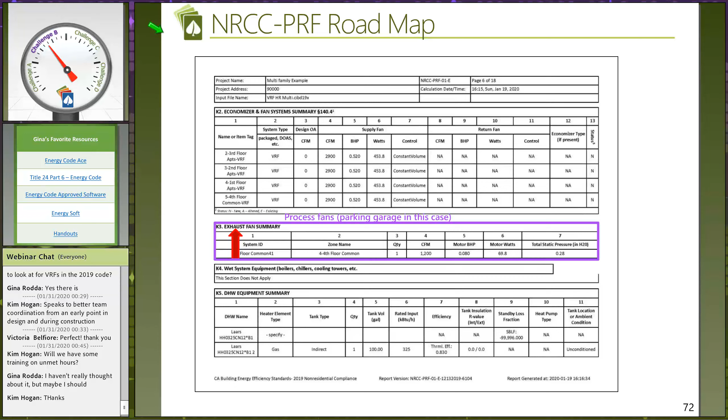I wanted to point out here at this particular table, because it drove me crazy, I had to call the CEC and ask why my exhaust fans for my multifamily units weren't showing up here. Oh, this is process fans only. So they are going to change that title in the next go round of the forms to make it clear to everyone else, because it really stumped me for a while.

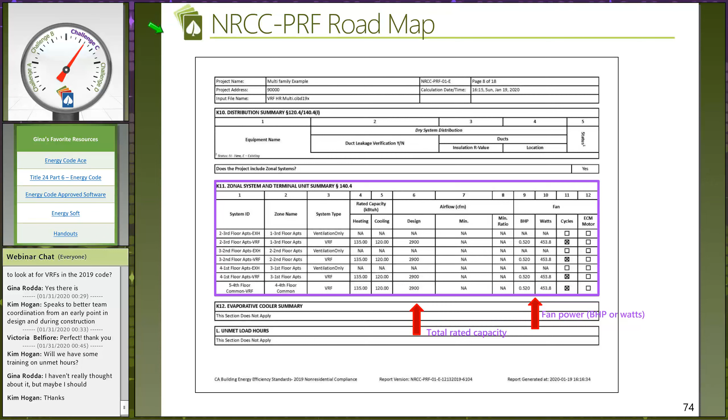At the zonal summaries, I'm going to see the fan numbers associated with my fans - those brake horsepower or watts. Strongly suggest you use watts, don't use brake horsepower, it's going to make a pretty big difference to compliance. Make sure you look at these and that it's lining up properly to the design.

So now that we've gone through mechanical with you, we have a couple questions for you.

My first question: at the system level, which tab are you going to use to support any adjustments you want to make to the fan energy? Because we got so many nice bells and whistles associated with this particular version of software. Where in the building tree do you model VRF systems? Select all that apply - hint, hint, it might be more than one place. And then my last question for you: where can you import VRF equipment data from that's already been fully developed?

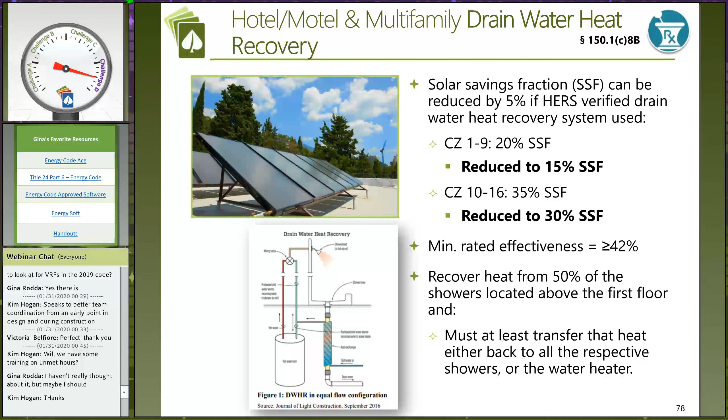But I might use it for projects that need above code compliance or are really trying to stretch out how they're showing compliance with their different building features. So let's talk a little bit about how we go about modeling this.

So again, we're going to go here to my zonal level, and at my dwelling unit tab is where I'm going to put this shower drain water heat recovery. Martyn, walk us through what my options are.

Okay, so when you are modeling this feature, the assumption is that under each shower you will install a heat recovery device. As the hot water goes down the drain and the cold water comes in, it will warm the cold water up. That cold water then has the option to feed to various sources. One option is it feeds over to both the shower cold water supply and back to the water heater. The second is it just feeds back to the water heater, and the third is it only feeds to the shower cold water. So the idea here is we're taking all that wasted hot water going out, recovering it, and using it to pre-warm that cold water stream.

What you need—oops. Sorry, you had to go backwards. Sorry, my mistake. What I want to point out to you guys is—where'd it go? There you go. Okay, so what you need to indicate are your shower feeds: how many showers you've got, how many have a hot water heat recovery drain water heat recovery, and the CSA rated efficiency.

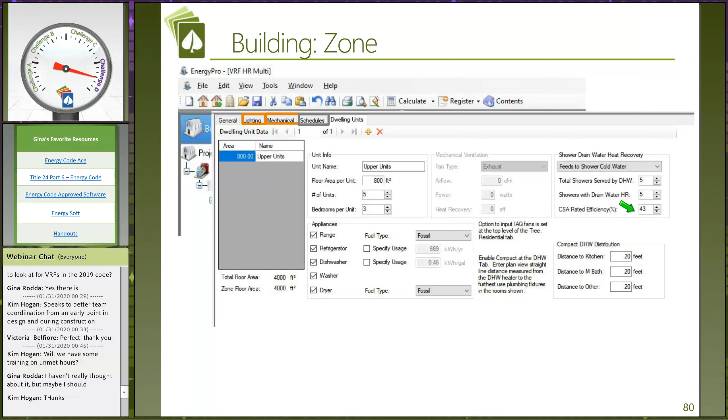And CSA is some sort of Canadian something or other association. Oh, you've impressed me up until this moment that you know what all of these stand for, Martyn. I'm not impressed anymore. I think it's probably Canadian Standards Association. Oh no, it's a Canadian Shower Association. I've got it now. Oh yeah, you're trying to get yourself ahead of the game.

Let's talk about central heat pump water heaters, Martyn. This is not something that's in the software yet, but we're being told it's happening soon. What came out over the holidays was a prescriptive option to use central heat pump water heaters for multifamily buildings, and this is becoming a pretty big deal for cities going all electric. It applies to high-rise, hotel, motel, and low-rise residential.

This is covering a lot of building types, almost all of them residential occupancies. There are more pages to this particular docketed report that give diagrams of how to go about this prescriptively. It is pretty restrictive on equipment type—there's pretty much only two pieces of equipment that can meet the prescriptive requirements of this alternative option for central heat pump water heaters.

But Martyn, what are we hearing is going to happen with the software? Well, if they're on time—Deanne said to us yesterday, in the next week or two we should be seeing new versions of CBECC coming out, which will feed over to us, and you'll get new versions of EnergyPro, we'll be calling it 8.05, that will allow us to model the central heat pump water heaters. That's actually pretty exciting news. It's unfortunate that it's only going to be called 8.05 because you'll think of it as a minor update, but I consider the central heat pump water heater to be a major feature.

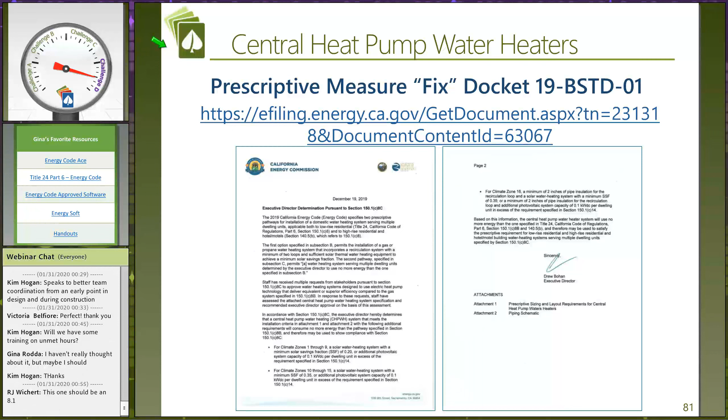And I'm looking forward to seeing what happens when I can't meet all of the prescriptive efficiency requirements of the water heating systems, and what type of flexibility options I might get. Or maybe they're going to say you only get to use certified equipment—we're back to only those two pieces of equipment. I have so many questions, and I'm so looking forward to getting this update to be able to play around with what's going on with central heat pump water heaters.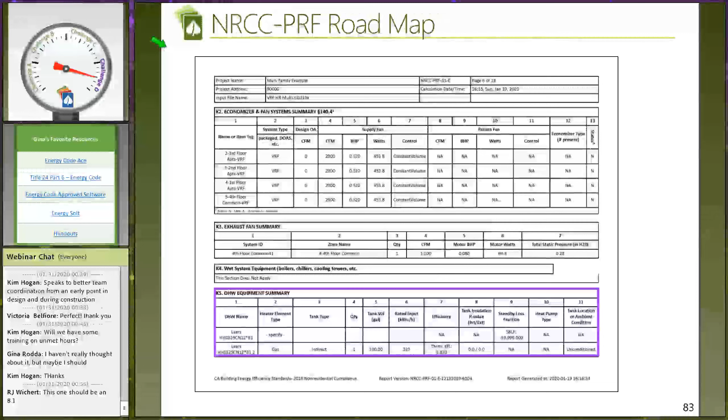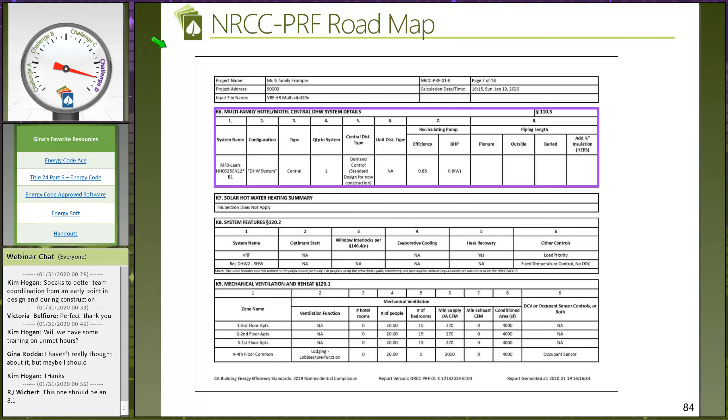So when we look at the performance form, I have to tell you, drain water heat recovery is not currently supported in the forms, but hopefully we'll see that, along with the fan pressure drop adjustments, included in the next round of the form. I do think the form does a beautiful job of indicating my central recirculating systems and the different types of controls in play. There are so many ways to do it, and I could take penalties for doing it the wrong way, or get a lot of credit, especially for controls. I want to make sure they're right.

We have one last check your understanding question with you guys today, and our question to you is going to be: how often should you update your compliance software?

So Martyn, tell us about how EnergyPro is going to inform us there's an update we need to download. Okay, so you guys can go into EnergyPro and go to Help and look at EnergyPro News, and we'll have announcements there. On most people's computers, that should pop up automatically, unless your system's got automatic pop-ups disabled. We're also looking into having a check for updates done in the background every couple of days, so we're increasing ways to make you guys aware of updates.

But I can't overstate the importance of the updates for you guys. I realize you're saying, oh, this is just too many updates, they're all coming to us at once, et cetera. Well, there's a lot of things being fine-tuned here at this stage in the code cycle.